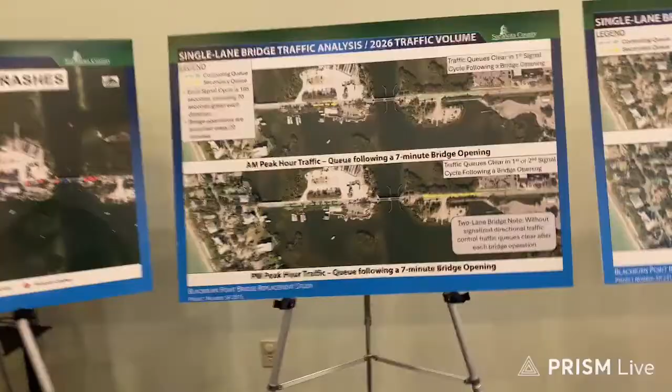That's interesting, isn't it? Nobody makes the bridge anymore, so the parts you have...

That's fine. So they said 20 million times 75 years, the lifespan of the bridge. That's still a...

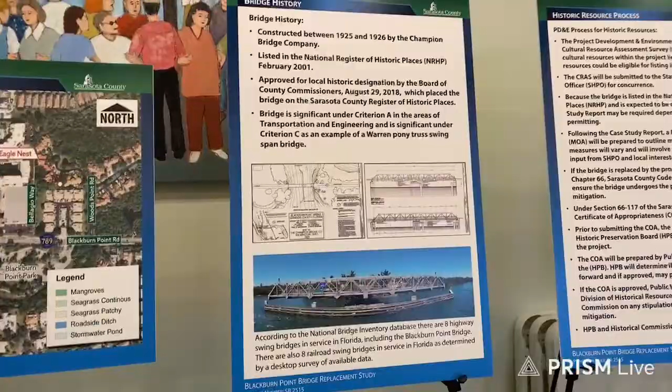That has not been made available to the public at this point in time. The report is not done yet, we're finding it, but we are doing it, called the Natural Resources Evaluation. And as part of that, we're creating all of this.

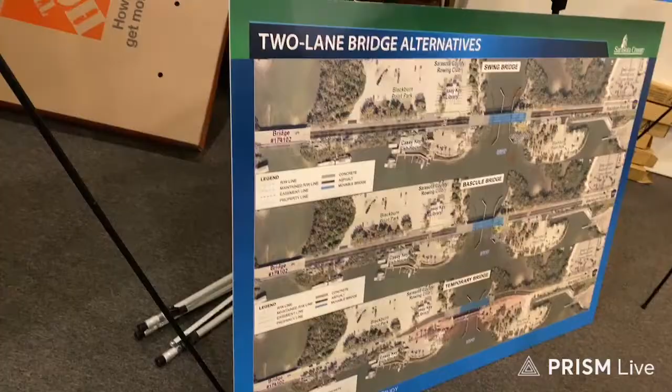Can you get the words that you missed?